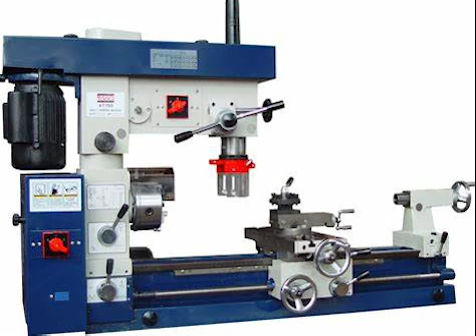All right, here's your typical hobby type machines. I just took a few screenshots off a search on the internet of this type of machine where you could conceivably do some kind of milling on the turning part in the lathe.

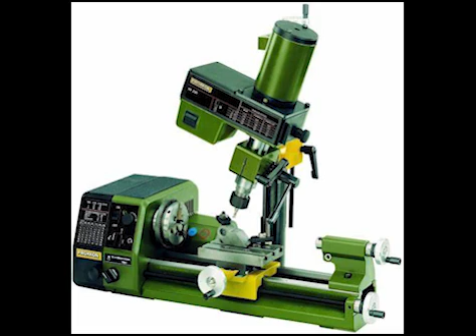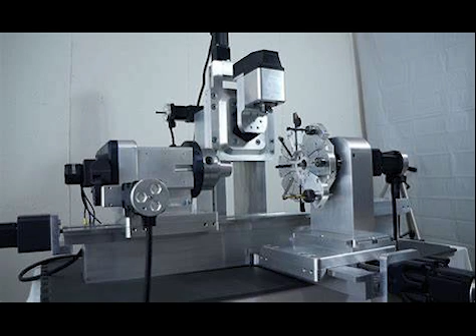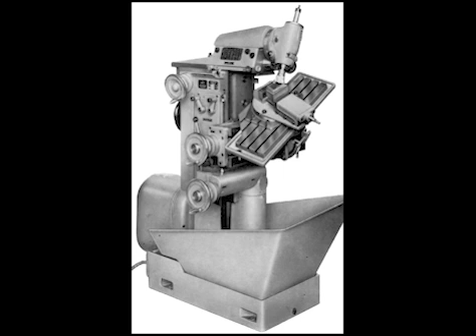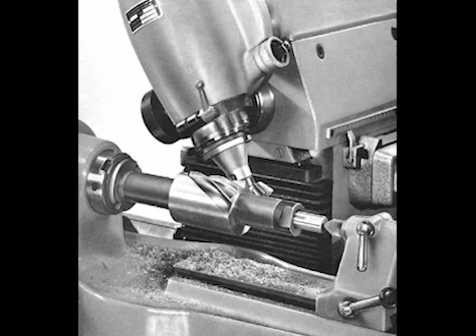But these all have the disadvantage of not being able to move in the y-axis. Now this one, I think it's Swiss Mac, can do that all like a real mill turn, but these others just don't have that ability. And also, these Deckel and Schaublin type of machines are kind of interesting the way they work, but still, they all don't have the ability to actually do milling and turning and five-axis positioning type of work.

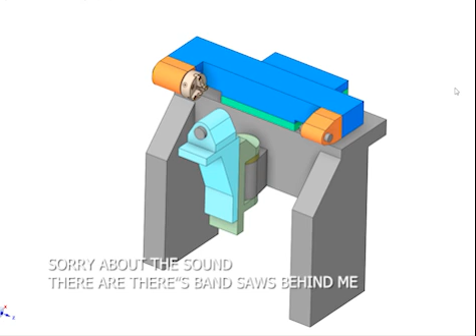All right, here's my idea of a small, like DIY mill turn type of machine. Now, the normal way they make these machines, like my Mazak's made, they have this big long slideway, and the X and Y and the B axis and everything rides on it. But that's not too practical to actually build for a DIY project.

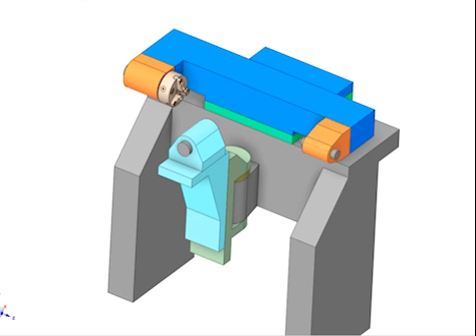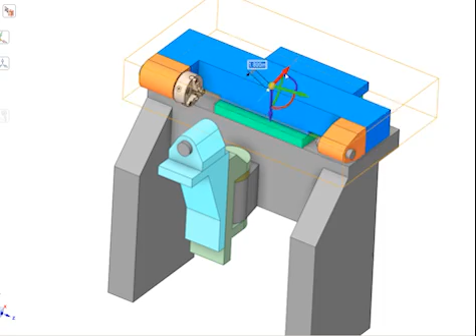So I thought this might be better, where the lathe part, the turning part, actually moves on this slideway back and forth. Let me see if I can actually move the... So if we move the saddle, it can move back and forth like this, okay, and the whole bed of the lathe can move in and out like this. If we look at this probably from a different angle, that's the way you can actually go in and out with the x-axis and everything.

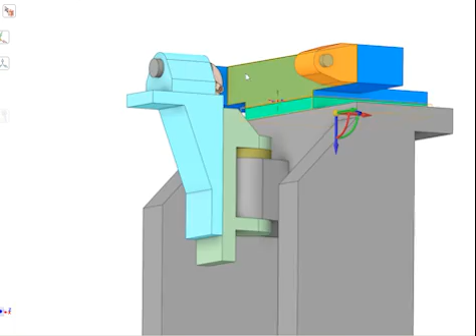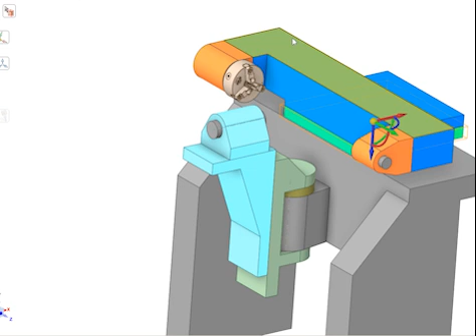We get back to the beginning here, and I've just got this blocked in very crudely, just so you can kind of get an idea of what I'm thinking. Here would be the milling spindle, if you will, or even where you'd mount turning tools and milling tools. And of course, all of this has to have motors laid out. Like the motor would probably be up above this milling spindle, and over here somewhere for the turning spindle, and it would be belt driven on the back here.

Now I'd have to figure out some way to rotate the C axis, and also to rotate the B axis. The B axis here, like if we just grab onto this, doesn't really have to rotate any more than back and forth like this. So that's pretty simple, and that can actually be done with a simple mechanism because it doesn't have to move but maybe 180 degrees or so, or a little more. But the C-axis is a little bit more complex thing.

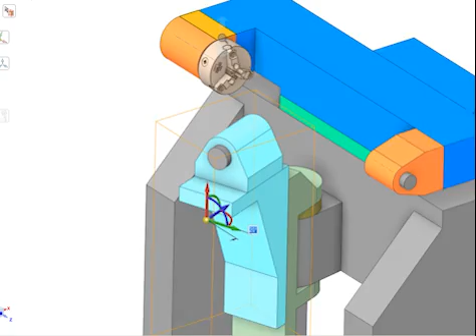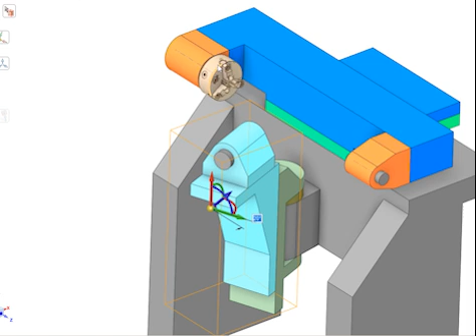If you remember, I was toying with the idea of a cam roller type drive. I don't know if I can make that work or not. Maybe a high resolution servo motor belt driven to the spindle itself would be good enough resolution for C-axis indexing. Have to experiment with that, but anyway, this is kind of the idea.

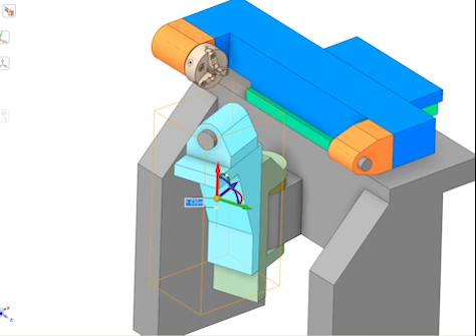So in order to turn lengthwise or mill lengthwise, you can go this way, and in order to come in and out, to turn different diameters or mill smaller sizes or whatever, you go that way, and then the y-axis here would be going up and down this way. So that's the way it would work, and then the B-axis, I should say, will rotate on this rotary axis down here. So that's sort of my idea on how this might work.

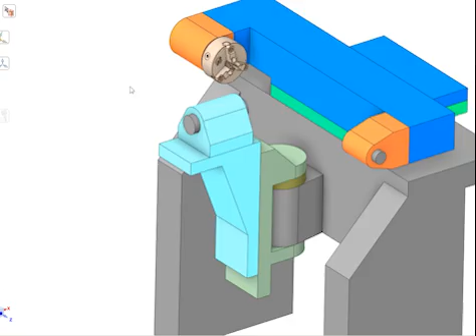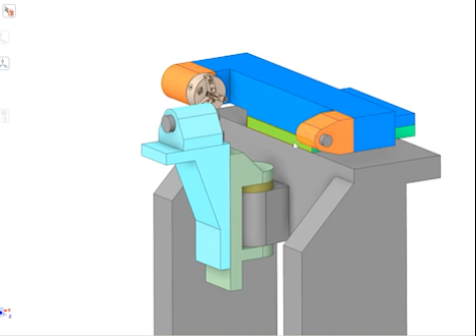It'd be fairly simple to build, and I try to keep the overhangs as short as possible. And I think this is the best way to do it. Of course, this is just blocked out, but there'd be linear guideways along this level here, and this would be the saddle piece, kind of like the saddle on a Bridgeport mill between the knee and the table, and there would be linear guides on the bottom here that would support this.

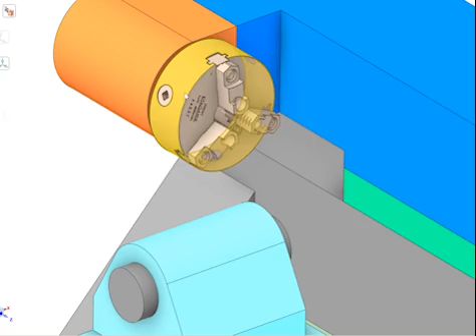And this model is drawn about 48 inches long, and from the center line of the spindle down to the floor would be also about 48 inches. What I've got here, I just downloaded somebody's model of a Kitagawa chuck, and this is a 6-inch chuck. Either have a chuck or a collet attachment or something like that.

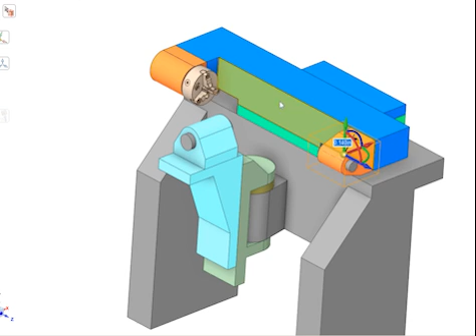And the tail center can be moved back and forth to grip on shorter parts, longer parts, or even taken off completely. And there might even be a possibility of putting a steady rest on here and stuff like that. That might be possible. I don't know.

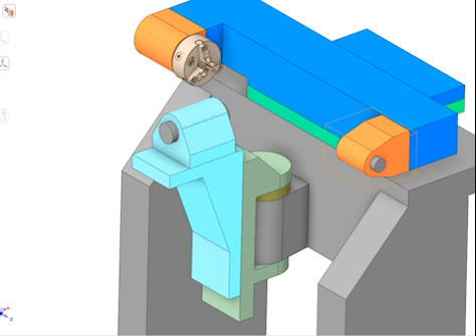Most of the time, you're probably not going to be doing parts between centers on this kind of a machine. You're going to be doing almost like 5-axis milling work, if you will. And so the y-axis can be rotated. Let me grab it here. It can be rotated all the way so that you can be parallel to the z-axis.

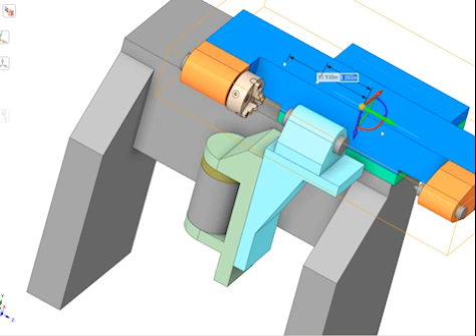This, of course, you'd have to have the lathe bed probably over this way if you're going to leave the tailstock on, but there's plenty of room for that. And you could be over here working on the end of the part, or at any angle you so chose, you know, if you want to be over here.

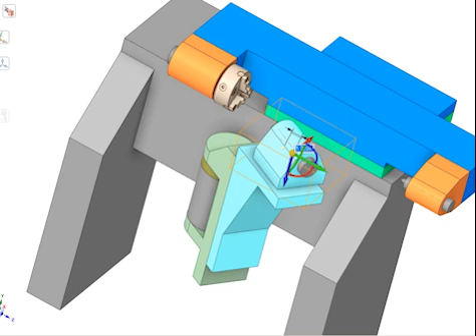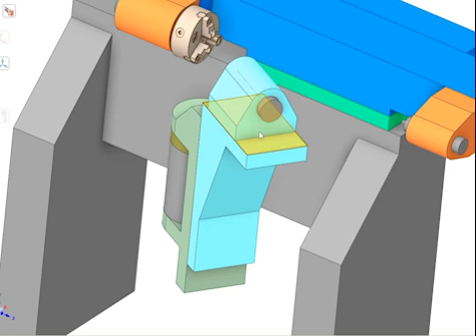Now, I made this little thing here. If you were to make this machine kind of like a manual type of thing, I haven't got that drawn correct in the CAD software too. But if you're going to do it as a manual machine, I thought it might be nice to be able to move this as if it was like a quill on a Bridgeport mill, and you could have some lever operated device and manually drill holes at different angles in parts. You could make this as a manual machine even if you wanted to.

For some reason I haven't got this thing constrained right, but you could move it in and out. You could make a lever operated thing, I guess, of some sort. You can move it in and out to drill holes.

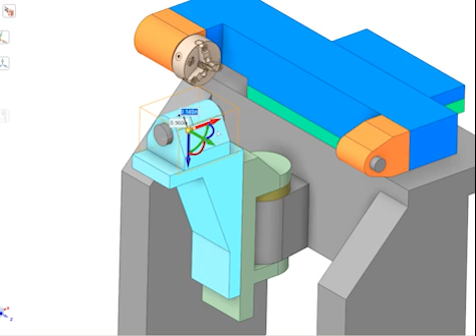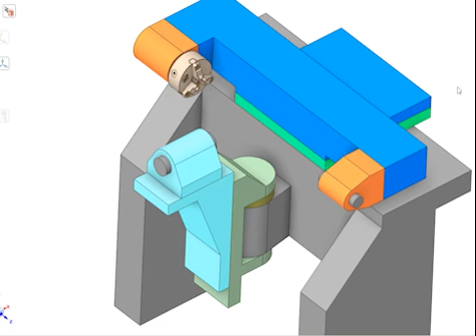Now, the reason I even like this configuration of a machine is that after using various types of machines in my machining job, I found that this machine is the most useful configuration of any machine that I've ever run, because you can do more or less everything you need to do. You could even mill T-slots or something in the face of this, and you could even use this as a milling machine if you just took off this tailstock and clamped parts on here, kind of like a horizontal mill on the side of the tombstone.

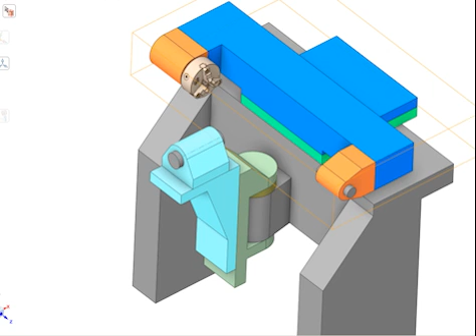You know, if you brought this thing forward, you could even machine, and you could even tip the B-axis at angles and do almost like, not really 5-axis, because you need the C-axis rotational direction, but you could do various things. You could mount a work holding fixture on there even and use it that way too.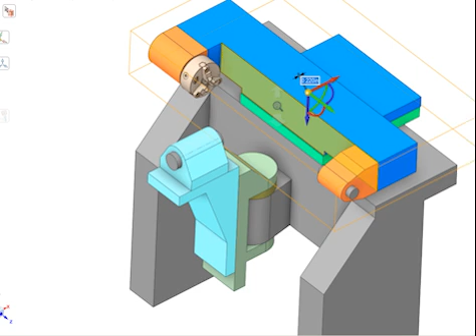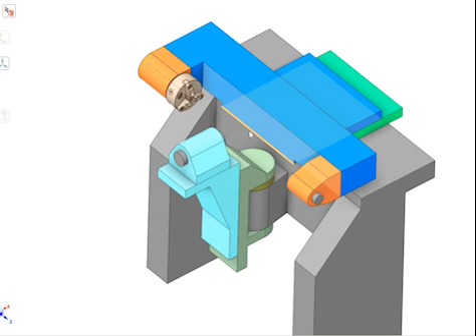But for the most part, most of the parts you make when you machine start out as a lathe part, and then they go over to the mill and they get milling done, or they get holes drilled in them, or various things like that. And this type of configuration of a machine covers almost everything you need to do in the machine shop. Like, I would say 90% of everything. There's only the parts that are straight milling jobs that are large that it wouldn't really cover as well.

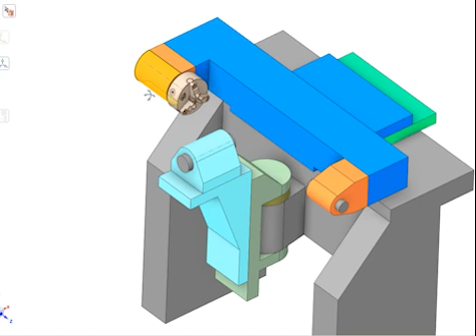But for your general type of what I would say hobbyist type of machine work that most people do, a machine like this could do everything. And you wouldn't really need but one machine to do everything if you had a machine like this. So I think it could be a good alternative to having a separate milling machine and then a lathe and all of the fixturing that goes with having those two pieces of equipment in order to do what this machine could do all in one machine like this.

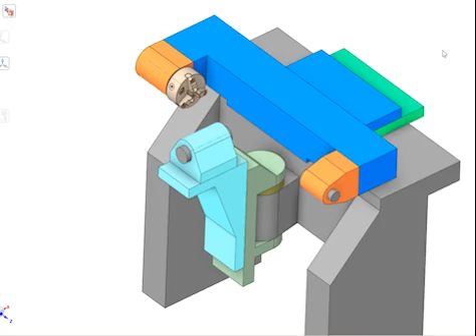So anyway, that's kind of my thought process here now. If I could just maybe flesh out this design in more detail and everything, and possibly even build one of these things. I don't know. Let's see. Anyway, that's my idea on the machine.

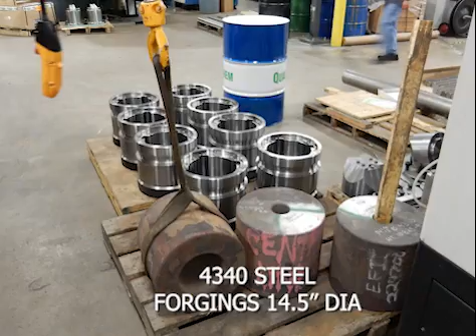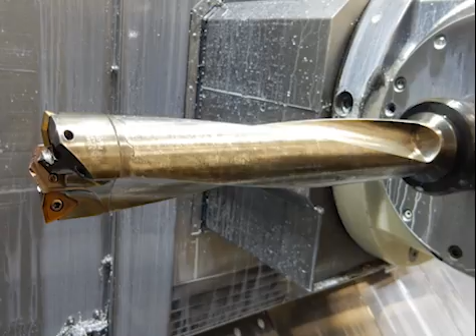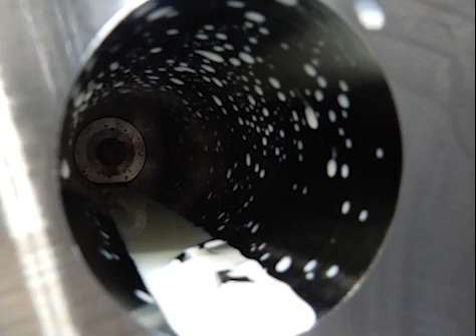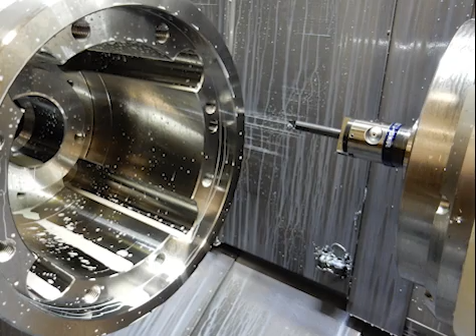Here's some shots that I did on a part a long time ago. Before I made YouTube videos, I never really posted any of this on the internet. And this is the type of work you can actually do with these type of machines. You can turn the diameters and you can do the milling and everything all at the same time. There's that hole. There's 4 holes that had to be drilled, and then this all had to be milled and turned out, and all the details in the bottom of that with that face groove in the bottom of the bore and everything. So these parts I did before I was making YouTube videos.

So anyway, that's just my ideas on a possible machine that I could build if I can ever get the time to do it. So thanks for watching.